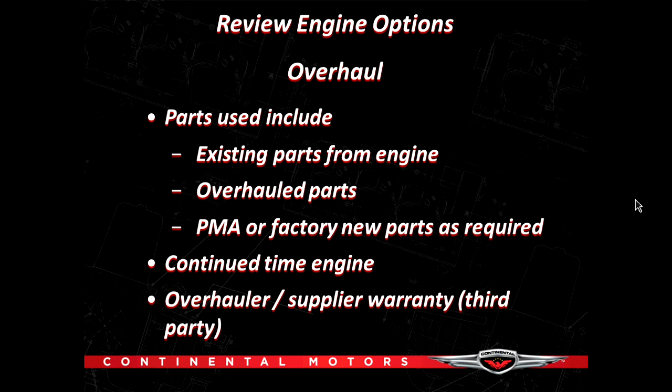It may be 0 since major overhaul, but the continued time on the engine continues to run. For example, if your TBO was 2,000 hours and you decided to overhaul the engine at 2,000 hours, your engine would be 0 since major overhaul, but 2,000 hours total time. That's very key when we're talking about that because it can affect the aircraft value.

When we talk about factory rebuilt, which again, another slang, reman, rebuilt and reman are used synonymously within the industry, and the FAA only recognizes the term rebuilt. Reman is sort of a slang term that's been developed over time, but rebuilt is the accurate word. That's the one that the FAA recognizes, and the only people that can grant rebuilt status and zero-time status to a rebuild is the factory, whether it be Continental or Lycoming. A new engine serial number is provided at that time.

The engines are produced to new fit tolerances. We went over some of that last week about the gold standard features in a Continental engine, how they're built to that balanced and blueprinted stage now. The good thing about a factory engine is you receive full core credit for the runnable core. As it comes in, if the crankshaft is cracked, or it's out of dimensional tolerances, the crankcase is out of dimensional tolerances, and all of it has to be scrapped, you're not penalized as you are with an overhaul.

When your engine goes to an overhaul shop and you're quoted a figure of, let's say, $25,000 for an overhaul, and then we find that the crankshaft is cracked and needs replacing, well, that's an upcharge, and then the crankcase needs to be replaced, and that's an upcharge, and pretty soon that $25,000 overhaul is now up in the $35,000 and $40,000 range. So we want to be very cautious and careful about that, and understand that with the overhaul choice, you're rolling the dice on whether or not the parts are going to be usable again, and whether or not they will meet service limits.

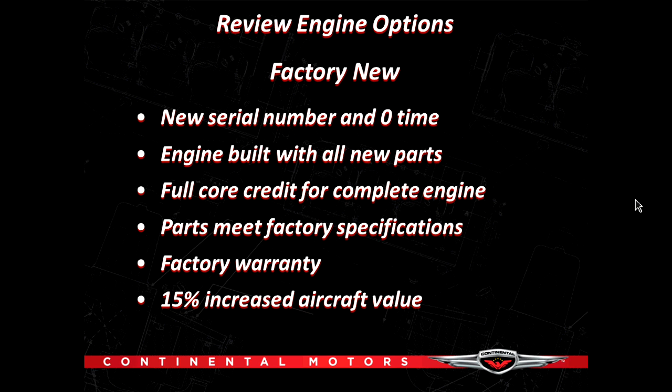That's just a review of overhaul, rebuild, and new. Tonight, I want to talk about some of the hurdles that we face when we're making this decision. There's a financial element. Certainly at my house, there's a gatekeeper.

I joke when I'm speaking at different forums that my wife has a warped sense of priorities, like our children's college tuition and things like that. She doesn't see the importance of the airplanes like I do. And I'm just kidding. I do value the education, and my daughter is currently enrolled at the University of Alabama.

But we do have a financial decision to make. There's always going to be some associated items that we will want to replace when we are repowering the airplane. When we change the engine, we're going to talk about some of those things. We'll talk a little bit about performance upgrades. There are many options out there for many of the aircraft that you fly, many horsepower performance upgrades that can really maximize the use of our airplanes. And then it is key getting the right facility that will perform the installation of the engine.

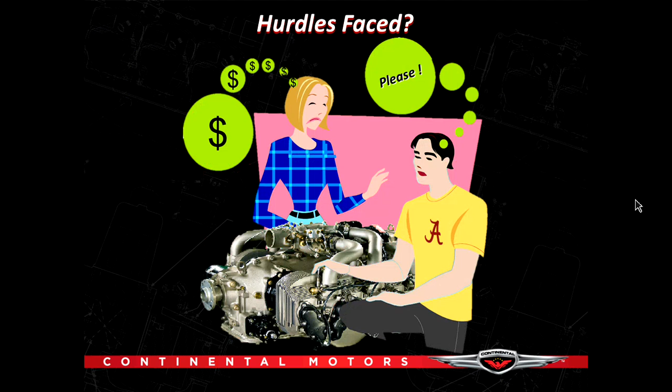You notice my friend there in the cartoon is wearing an Alabama shirt, so I'll shout out a Roll Tide to all of the Alabama fans out there.

But this is something that often comes about, and it could be the wife can be the pilot, and the husband can be on the other side of the decision. But this is a typical decision that has to be made.

I tell the story a lot of times about how we have a small farm here in Mobile, my family does, and I used to spend a lot of my time cutting grass in a pecan orchard and things like that. I finally talked my wife into allowing me to buy a 17-foot wide mower, and I did it by telling her that the 17-foot mower would let me cut the pecan orchard so fast that it would allow me to have more time with her. Now you pick how you want to work on your spouse or significant other or whatever, but that is certainly a hurdle to get over.

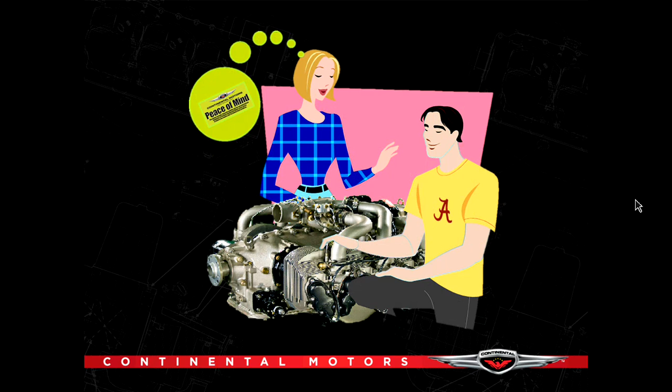In all seriousness, when we're talking about an aircraft engine, we're talking about peace of mind, and we're talking about safety and reliability of you and your family and your passengers, and trying to minimize liabilities and things like that. There is a peace of mind in knowing what is in your aircraft engine, whether you go to a reputable overhauler or you go to the factory to get the engine.

Now, I want to talk just a few minutes about replacement items, because we run into this all the time with customers who come in to Continental Motors Services located in Fairhope, Alabama. I mentioned that last week, and I'll talk about it a little more. That's our service wing, or MRO, of Continental Motors, and we do many, many installs at that facility of factory engines. I think we're probably the best in the world when it comes to installing the factory engine.

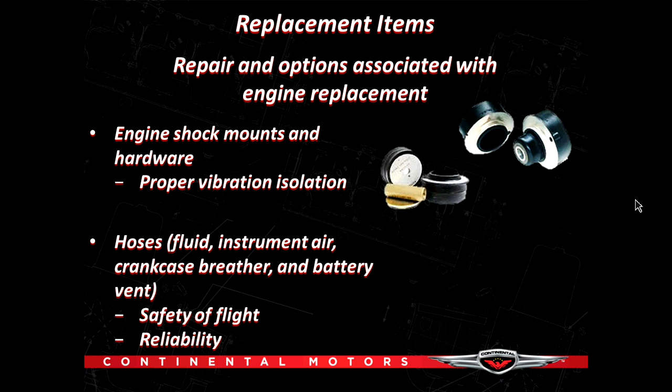But it surprises me that there will be mechanics that will install new, rebuilt, or overhauled engines into airframes, and they will skimp on or forego changing engine mounts and hardware. And this is one of the things that's very, very key in the smoothness of the engine, to have those items replaced. Nine times out of ten, when we in technical support get a reported vibration in an engine, it is simply an isolation issue. The engine is not isolated from the airframe. Either the mounts are worn or there's something in contact that doesn't provide the proper vibration isolation.

I'll tell you a quick story of a time when a customer purchased a platinum engine. At the time, Continental was building platinum engines. We talked about that a little bit last week, that Continental learned from the platinum engine, and now we build our engines to that specification. But at the time, it was a cut above the standard rebuilt or new engine, so the expectation is that it would be a much smoother engine than the standard engine. A mechanic installed that engine, and they reported a vibration that shook the instrument panel. It buzzed in the seats, it buzzed in the rudder pedals, and to fly the airplane, one would think that the engine was coming apart.

I was dispatched to that as a young tech rep at the time, and flew the airplane with the customer to do a look, listen, and feel. It became very evident to me that this was an isolation issue, just based on past experience. I opened up the cowling, did a cursory inspection of the engine, and quickly saw an induction clamp, just a simple clamp, where the tail of the clamp was in contact with the engine mount. I asked the mechanic who was there for a slotted screwdriver. I loosened the clamp, adjusted it off of the mount, retightened it, and we flew again, and the owner told me that was the smoothest engine that he'd ever been behind.

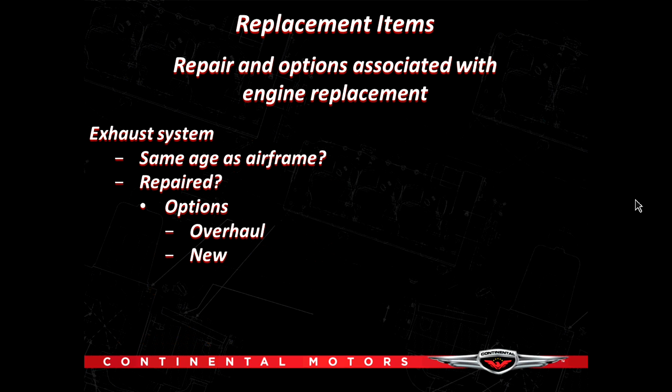Another thing that's key is an exhaust system. Many times these exhaust systems are the age of the airframe. A lot of engines that we produce here at Continental Motors do come with new exhaust systems, but many of them do not. That was specified from the aircraft manufacturer. Many of the Cessna products were outfitted with the exhaust system at Cessna. And that's something that one wants to look at very, very closely.

In my short biography that I gave last week, I talked about working in engineering and analytical and accident investigation. And you'd be surprised at the number of problems that can arise out of a disrepaired exhaust system. I've seen countless leaks and cracks that can manifest themselves into other engine problems. For example, a turbocharged engine leaking exhaust can superheat induction air if it's near the induction system, and can raise the induction air temperature to a point where we could experience detonation, and that certainly will ruin your day. So we don't want to skimp on those things either.

So we want to look at those items. If you've purchased an engine that comes with an exhaust system, fine. If it does not, you certainly want to have that exhaust system overhauled or inspected or replaced. Again, it's not that big of an investment, and it certainly can go a long way in providing good life out of the engine. So make sure that your maintenance provider is considering that when we're looking at the engine change.

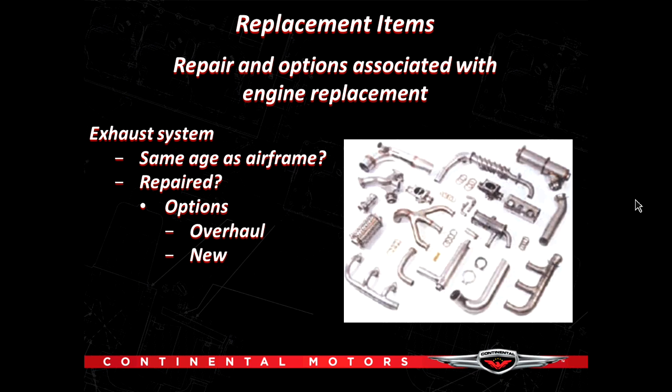Also, when the engine is replaced, and I'm speaking for constant speed propellers, those propellers that we can vary the pitch on, it's important that those propellers, if they've not been serviced recently, be overhauled, flushed, and cleaned at the time. Particularly if we've got an engine that's way up in age, it's past TBO, we're starting to see some metal levels in the filter that are starting to rise. It is very important that propeller and governor be sent off and flushed and overhauled, because those items can be contaminated with the metal that's being displaced within the engine. So never skimp on that.

If your engine and filter are clean and just a couple of hundred hours ago you had an overhaul of the propeller and governor, that's fine. But if you've had any increasing metal in either an oil analysis or on looking at a filter or screen, it would be very prudent to go ahead and send that prop off to have it at least flushed, if not overhauled. And the same thing with the propeller governor.

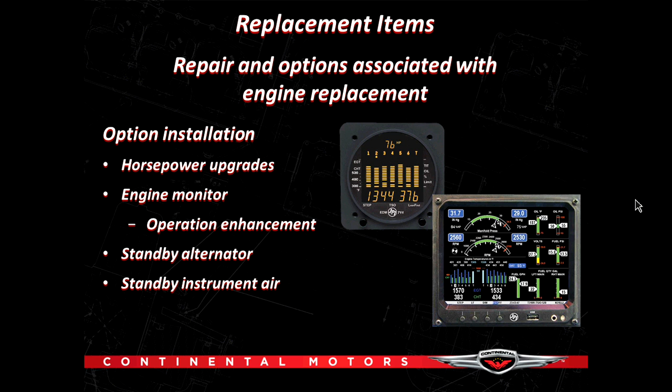Proper installation of the aircraft engine. I can't stress enough how important this is. Last week I talked about this, and if I've heard it once, folks, I've heard it 1,000 times: well, the guy that's putting in my engine in my Bonanza worked for the airlines for 34 years. Well, that's impressive, and I applaud that service to the airline, but that's not a Continental engine in a Bonanza that he's working on. In fact, at a lot of the airlines, the mechanics are very specialized. So you may have a mechanic whose specialization was DC-9 landing gears, and then he's going to be putting your engine in your airframe.

Be careful about that. There are some questions that you want to ask as to his qualifications. How many times have you put in an engine? How experienced are you? How experienced are you in troubleshooting? One of the things that we do at Continental Motor Services is when the airplane is delivered to us, we always do a look, listen, and feel flight, and we record a lot of data on that flight. We look at cylinder head temperatures, fuel flows, aircraft speed and rigging of cowl flaps, and the list goes on and on.

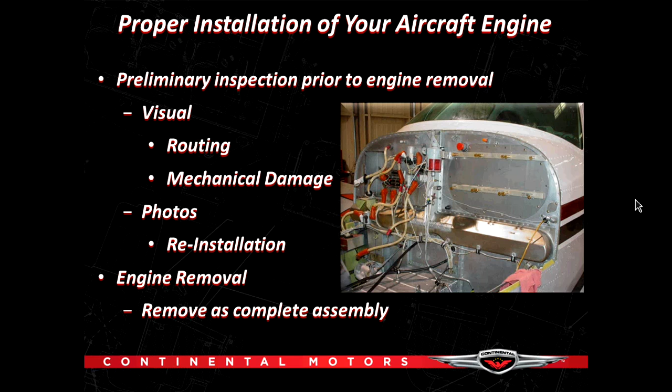If the owner wants a repower, he can call us. We order the engine. We get it from the factory. We take it to Continental Motor Services. We build the engine up and get it ready so that when the airplane arrives, we take the engine out as a complete assembly after the flight and after the pictures. We send the prop and governor to our facility to have them overhauled, and then we remove the engine and reinstall the engine as a plug-and-play package. And we do it as a complete assembly. Very important that you have somebody that's very competent and that has done that before.

Here is an example of one that we did at Continental Motor Services. This is a unique example. This is an A36 Bonanza with a 550B installed in it. The owner came in with, we'll say, a tired engine. The engine was certainly nearing TBO, and he was complaining of a high cylinder head temperature on number 5. When we got the airplane, it was a very nice Bonanza. We looked at the airplane. There were a lot of things in what we would classify as a state of disrepair with the baffle condition. And the squawk was high cylinder head temperature on number 5, and the owner was thinking that this was somehow correlated to the engine time.

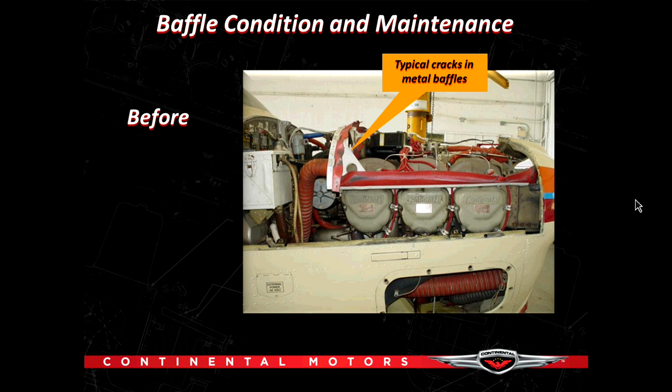Because he didn't have the baffle seal conforming to the upper cowling, there was an escape of that high pressure air into the back. Now, it was helping to keep the battery box very cool, but that's not really what we're worried about. We're worried about the cylinders. There were some other things that we noted, that there were cracks in the metal baffles. That's another place where air can escape and rob the cylinders of cooling air. The baffle seal on the side was making minimal contact with that upper side cowling. When we dropped the cowling down, there was a gap in there. So again, we had more air escaping around the side.

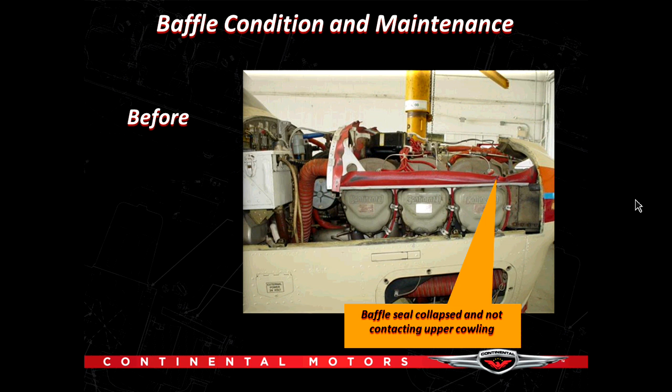And if you look at cylinder number 5, that was the one that he really complained of as being high. The baffle seal was collapsed. It wasn't contacting the upper cowling, and there was a large escape of cooling air around cylinder number 5. That cylinder was running hotter than all. And the owner, because the engine was at TBO, and it had some oil leaks and some things like that, he could have flown a little longer, but again, peace of mind was important to him, and we installed a new 550 with a D'Shannon baffle kit, and that's what it looks like when it's complete. And that's a nice, clean installation that he can be proud of for years and years to come. And he's protected that investment with the baffle condition and maintenance.

I talk to so many people that start to have cylinder head temperature problems, and you ask either the owner or the mechanic or the pilot, whoever, what's the condition of the baffling? And they say it's just great. There's no problem with the baffling. We go out there, we find those things that I just went over, those cracks and those minimal contacts. We've even gone out and found bird nests within the inner cylinder baffling, and mechanics are telling us that the baffling is just fine. Never skimp on that. Always protect that investment and make sure that that baffling is in good order. D'Shannon makes a very nice baffle for those of you who have a Bonanza, and it makes a very, very clean installation.

Also, when the engine is installed, and I'm speaking particularly for fuel-injected Continental engines, it's very important that the fuel system be set up in accordance with Service Information Directive 97-3 or the latest current revision of the Maintenance and Operator's Manual for that particular engine. You'd be surprised at the number of engines that never have this done. And mechanics always say to us here at the factory, those who don't know, well, didn't you set the fuel system up from the factory? And there's a presentation that I do on fuel system calibration and the reasons for that. And I'm going to try to give you the Reader's Digest version or the short version of it.

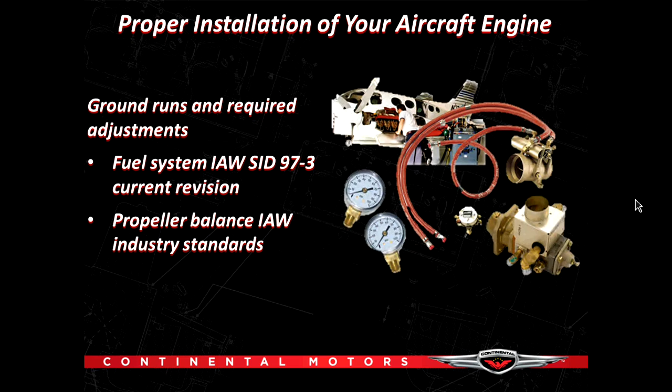Also, during the life of the engine, don't neglect oil changes. That is very, very important that you do the oil changes, that you look at the filter, look at the constituents within the filter, the screen, whichever you have. Always make sure that your maintenance provider is cutting the filter and examining that. Even if you're on oil analysis, make sure that filter is being cut and that those pleats are being inspected for changes. That's what we're looking for, is changes.

It's not uncommon to find a little metal in these engines. It's uncommon to find part numbers. You start seeing part numbers, it's probably time for some unscheduled maintenance. But in reality, what we're looking for is a relative change over time, both in the oil analysis and in the filter. Fuel system adjustment, I think I beat that dead horse to death. Very important. Baffle condition, I did that too.

Air filter is another item that's skimped on and overlooked. On the oil analysis and on the visual inspection of the filter, if I wash the constituents of the filter into a clean Petri dish and look at it under magnification, I can see how well the air filter is functioning, or the induction system as a whole.

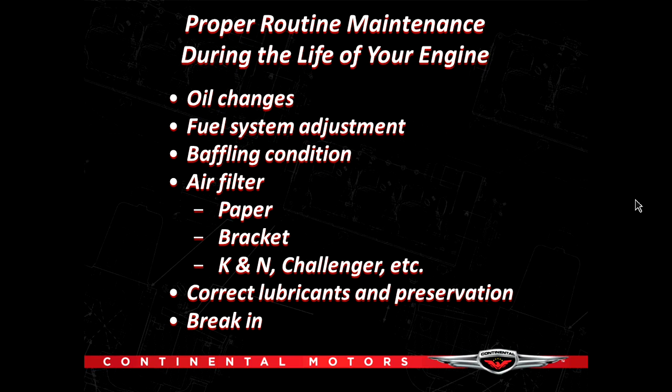Again, SIL 99-1 is a good document to look at if your airplane is going to be sedentary for a while. Look at that document and use that for lubricants and sealants, and also the document on preservation. It's very, very important. That can also be determined by how humid it is.

If any of you have been watching the weather here in Mobile, Alabama, over the last few days, we have really had some rain. It's been extremely humid here. I categorize it as absolute humidity. We had a little relief today, but we're in store for a 100% chance of rain for the next 3 or 4 days. Very humid climate, and that can lead to corrosive attack for engines that sit for a long period of time.